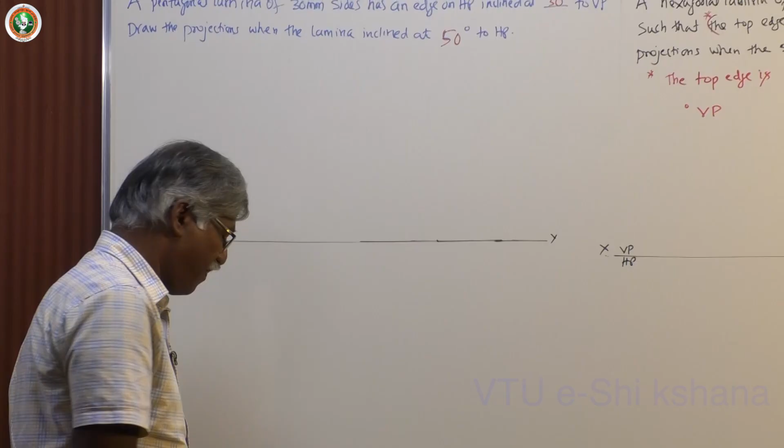Now let me take out one problem on pentagon. Normally in majority of the cases you get pentagon problem as the prime item in the question paper or test or in the classwork. Now let me take a pentagon. Here we have the corners named A, B, C, D, E, and I can have the references like this. The edge on HP, lamina inclined at some degree to HP.

Okay, and the edge on HP is inclined at some degree to VP towards XY line or away from XY line. If the situation demands, then only you do this. Otherwise, you always better take this. So first position, second position, third position. So this is how you get the problem solved. This is change of position method as usual. Now I have a problem.

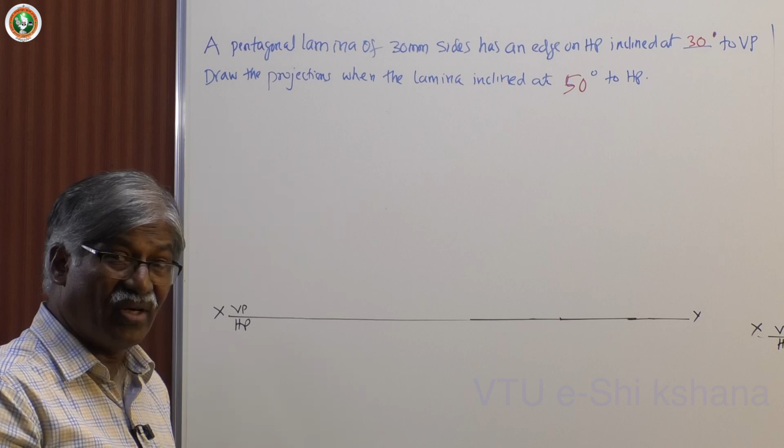The side of the lamina is 30 mm and it has edge on HP inclined at 30 degree to VP. See, the edge on HP is inclined 30 degree to VP. The lamina is inclined at 50 degree to HP. Not necessarily that always you should get combination of 45-30 or 30-45. You may get any value. If you get total value 90 degree, then only you must think of.

But if it is for only surface total inclination is 90 degree, then you get alpha or beta equal to 90 degree. If the surface inclined at 50 and the edge on HP inclined some value, say 40 or 50, then you need not worry. Different items. Now surface itself is having inclination more than 90, it's a problem. It's a vague problem. Now let me start working this problem.

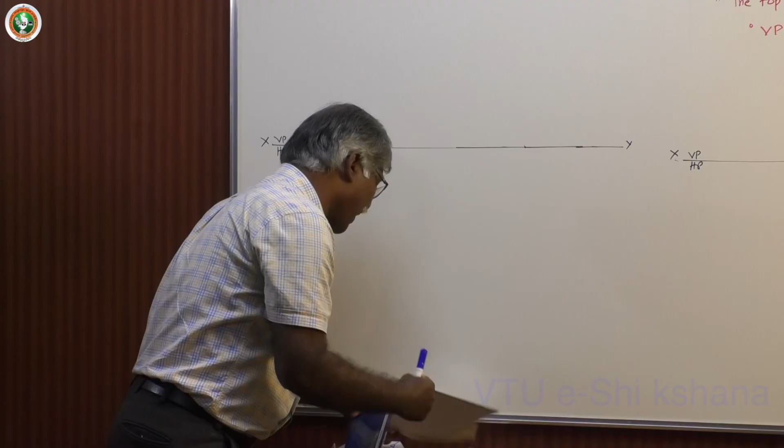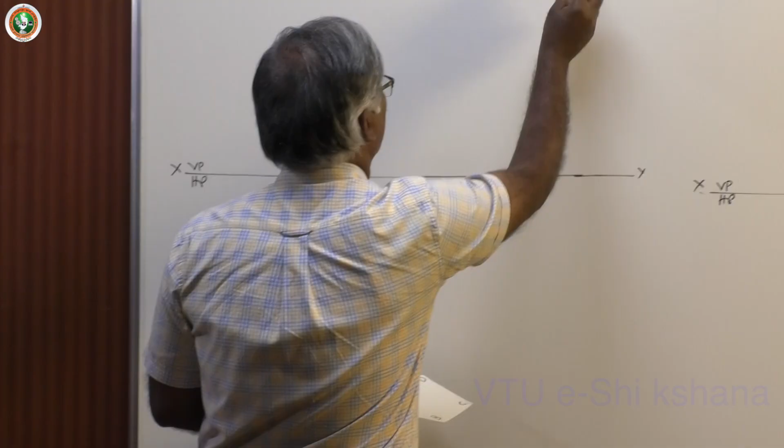So we have already the XY line fixed and the HP, VP, the standard format. Now let me have the edge condition. So from where you have to start? The lamina inclined to HP. So definitely you must make it parallel to HP. So you get true shape on HP. So this is very important. Start from top view, okay, because the lamina inclined to HP, so that is edge condition with respect to HP.

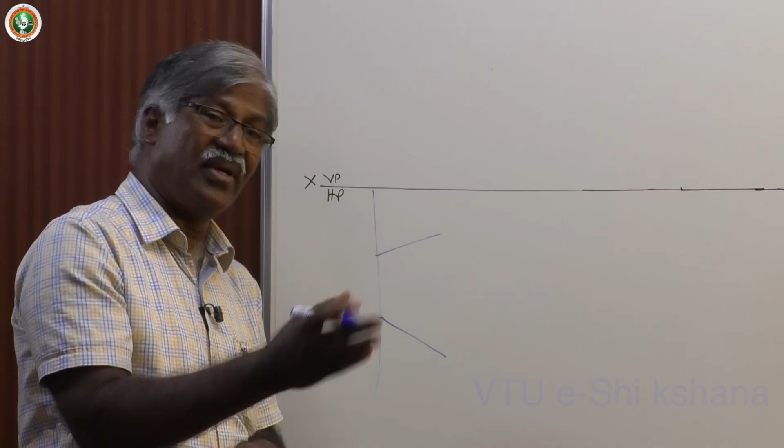So see, this is how you do it on a particular line, perpendicular line. You must have this AB, then do it. How to do manually? You have to mark 30 mm, little away from it, so that you should accommodate the entire figure. Then 108 degrees, 108 degrees. Take carefully. Normally we commit mistake by taking 112 or 72, instead of 72 we take 68. Then take same distance, mark.

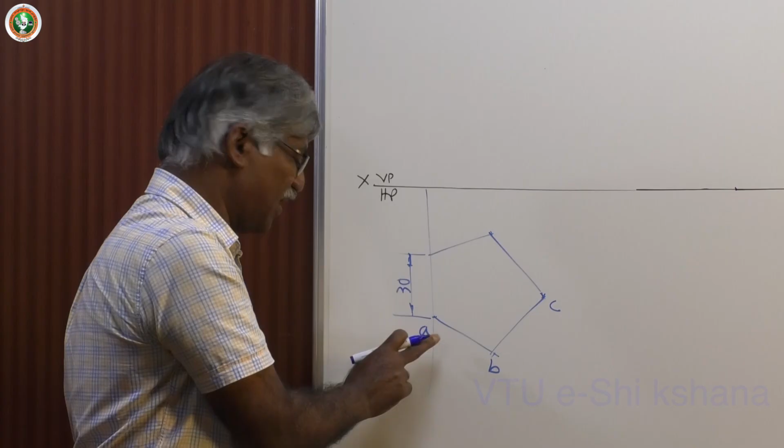Okay. Then with these 2 points as center, draw 2 more arcs, same distance. So 30 mm is the side. Should take this and then draw. Then join this. So this is nothing but the top view. This is A, B, C, D. Please observe, I have started from left extreme nearest corner. Always visible points first. Left extreme nearest corner is this A, B, C, D. Then dark this portion.

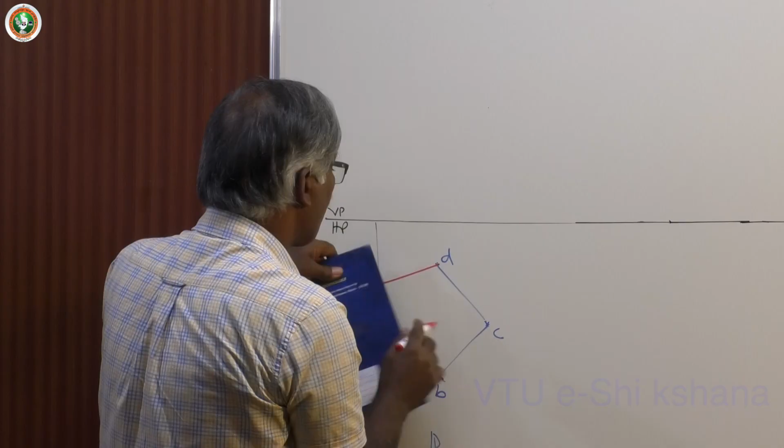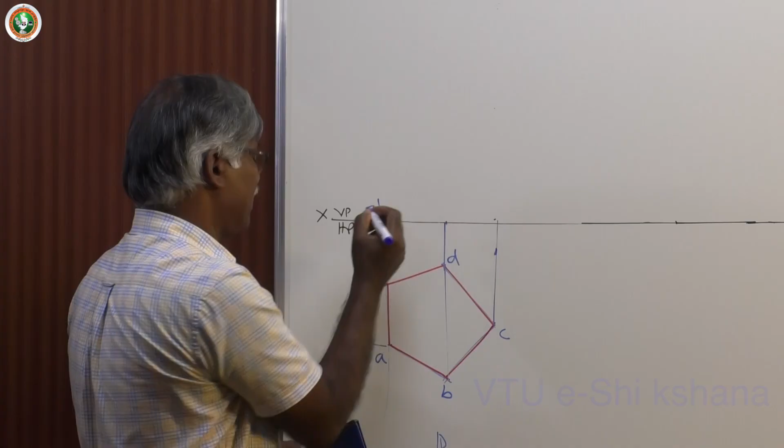Now project these points, corners particularly, towards XY line. Now let me have XY line reference. You should see that B and D in this particular case must coincide with a single line, and this is the point representing B and D. And next comes C. Project these points and name these points as A dash, E dash, then this is C dash, this one is B dash, D dash. Fine.

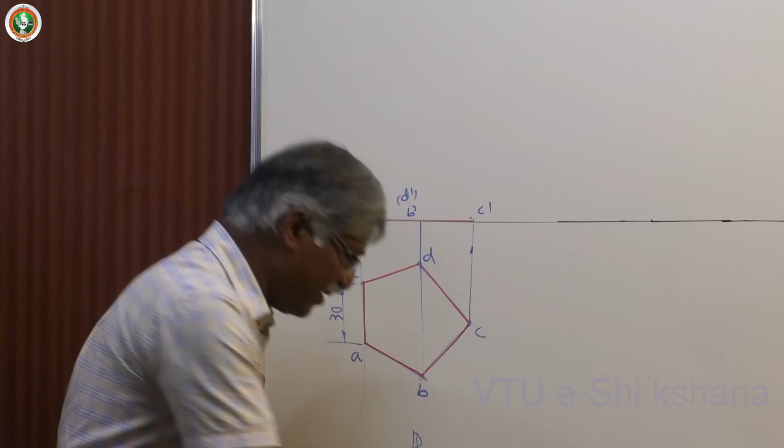We got the front view, dark. So this is the first figure, front view, top view, when the lamina is on HP. When the lamina is on HP, this is the case. See, A, B, C is visible, E and D are not visible if you look from this direction. Front view is a line on XY line itself because it is on HP. Then top view is true shape.

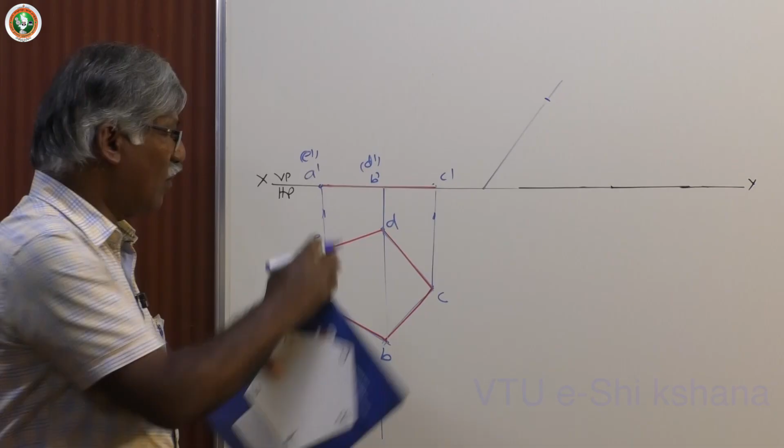Next, give inclination to HP. So how you do it? This is done manually by drawing a line 50 degree and take this front view length and draw an arc. In computer, move and rotate, that's all, it's easy. Here you have to mark a point, namely A dash, E dash, convenient distance, and then take this distance called radius, draw. Please note that this is not midpoint, this is biased towards right corner.

Okay. Now this is B dash, D dash, then C dash. In computer, what you do is, while drawing this full length, you mark this length and then one more length. That means two entities are there. But once you move and rotate, that gives a single one. Then you will be identifying this point. Otherwise, you have to note one particular mark with the straight line concept and then do it. That also I will explain once I start working on computer. Now, dark this portion.

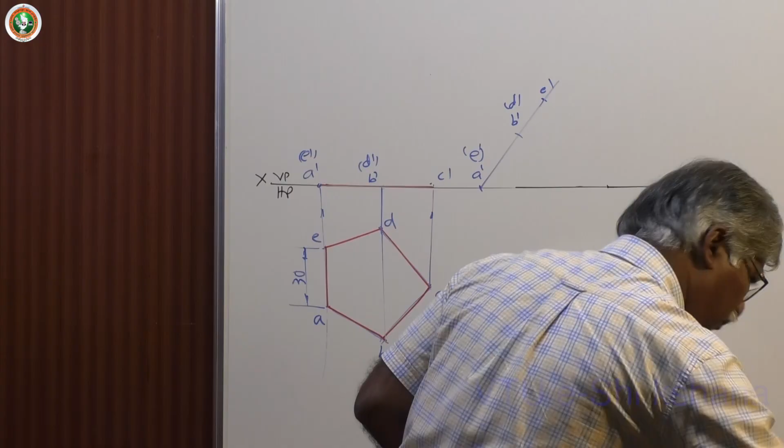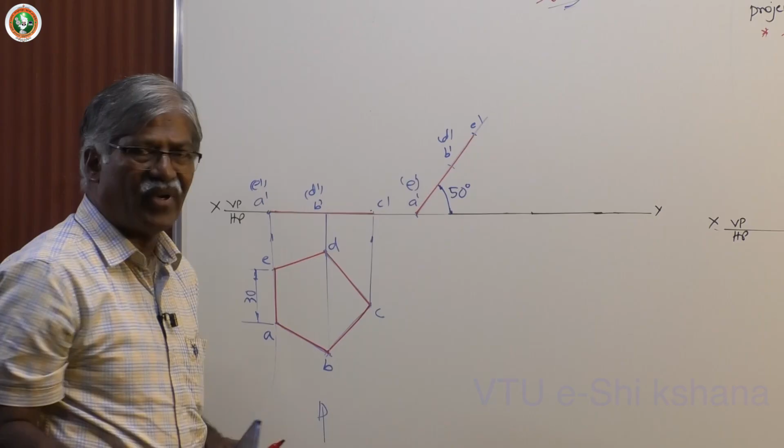Okay. Now, angle of inclination of the lamina with respect to HP is 50 degrees. It's very clear, it's given. This is over. Now, how to get the apparent shape? Project from the present front view and previous top view. So, you try to utilize the alignment indicator in case of computer software. Here also you can optimize, draw two stoppers, I can say. Project it, left extreme, right extreme projection from this corner, lowermost projection.

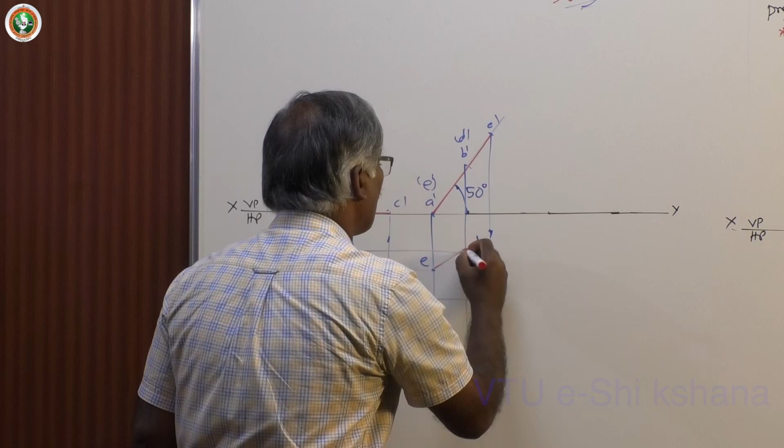Then draw B and D, then this line. You know very well that A and E stop here, and this is D, this is B, and one more point C is here. Okay, since you know C stops here, you can keep it here only, you do not worry about the extra. Now join these points, name them first, to avoid any confusion: A, B, C, D, E. Join them carefully. Yes, you got the apparent shape, second figure, top view.

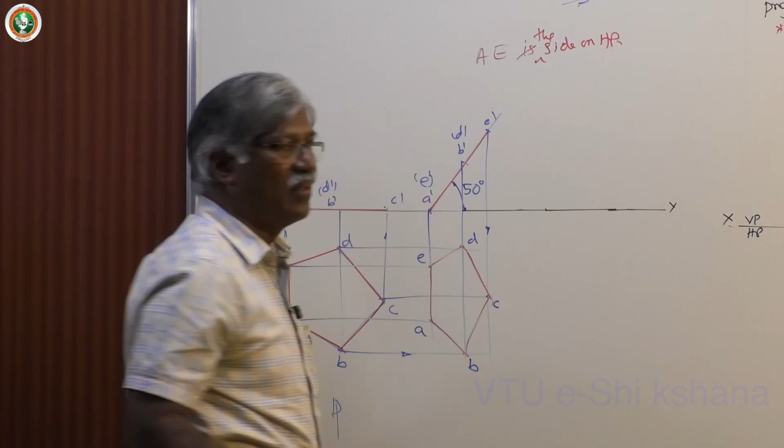Right now, this particular line EA, or AE, I can say, is the edge on HP, or the side on HP. Okay, see, AE, named it. AE first position, second position. AE is the side on HP. Now that is perpendicular to VP right now. I want it at 30 degrees to VP. So we have done this job in case of rectangle, triangle, square, etc.

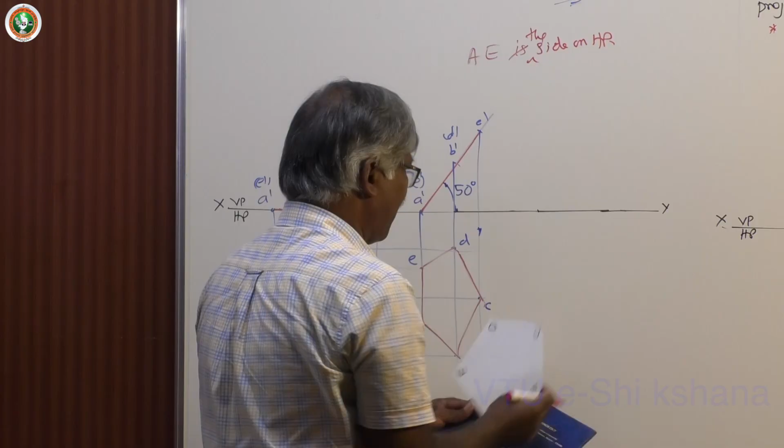Here also the same procedure. Assume that is the top view: first position, second position, third position. This is better, because if you do it like this, you have to judge before you draw where to draw. Here it is easy. If sufficient space is there, you can try it. Suppose if you keep it like this, it may cross this. So unless the situation demands, don't do that. By default, you take AE as the reference.

I will draw a 30 degree line. Keep EA first. Take sufficient length, E, then measure this distance, mark here, this is A. Then it's very easy to draw manually. Let me assume this is M for construction purpose. Then draw a perpendicular that locates one more point C here. Then take this distance, and that's all. Measure this clearly here, and then draw parallel to this. Then take AB equal to ED. Before joining, let me name them, yes, join these points.

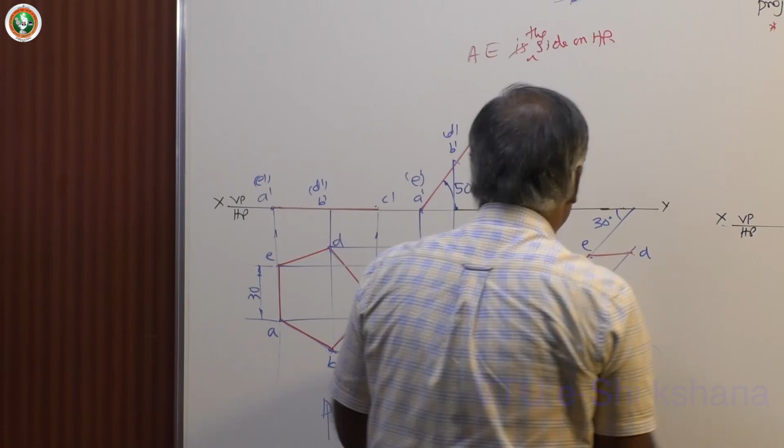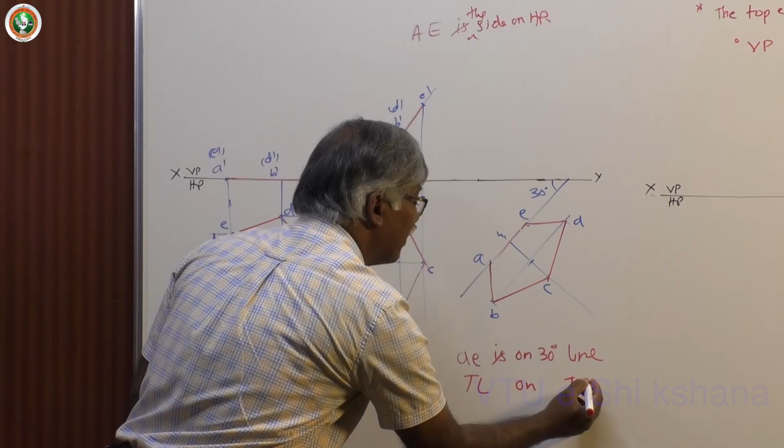Yes, I got the second figure top view redrawn with AE on the 30 degree line. That means it is true length on true inclination. That is phi. TL on TI, true length on true inclination. No question of beta because it is on HP. Now project these points onto the final front view. How to get the final front view? This is EA on the XY line only, because AE is on the ground, A dash, E dash.

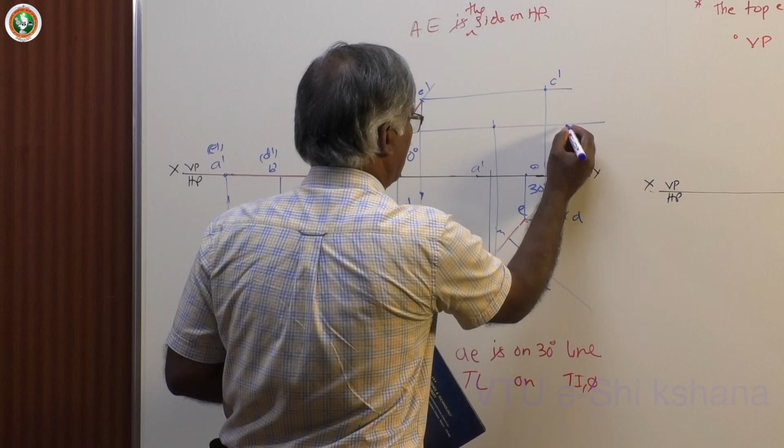Topmost point is C. Draw this, project it. You know how to work in computer, the alignment indicator is there, very easy. Then in between we have BD here, project it. Then project this one. Sometimes these two lines may be very close. That will be taken care of by the computer. Here also you can easily do it. In case of computer, try to zoom and then work it out. Now these two points, this is B dash, this becomes D dash.

Finally, we join these points. Be careful, try to locate the points, otherwise if you join some other corner, the answer will be wrong. A, B, C, D, E. Check this. Suppose by chance you keep it like this, that is no man's land. This one is E for us. Be careful. Now, final front view, final top view.

Let me check whether we have satisfied the conditions. 30 mm sides, fine. The lamina is inclined at 50 degrees to HP. Then the edge on HP is inclined at 30 degrees to VP only. It is on HP, inclined only to VP. This is the final top view and front view. Okay. So this is how you solve a problem manually as well as on computer. I will show you how to do it.

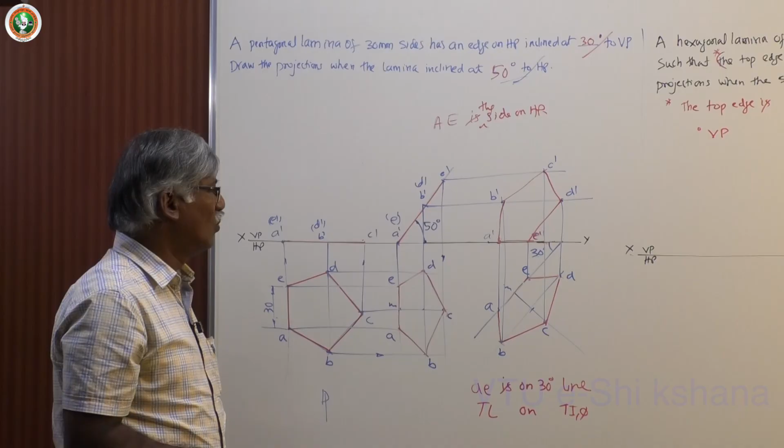Next, let me make a small change here and then try to work. Suppose he never gives this 50 degrees, he will not give the lamina inclination. He will give the top edge, or the top corner in this case. See, this is the case.

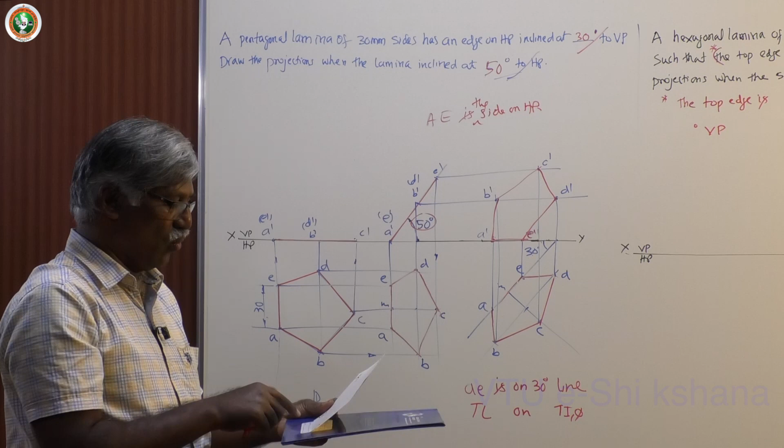See here, instead of inclination, he will give AE is on HP, say. For sequence I am considering this one, A, B, C, D, E, AE on HP. C becomes top corner. Suppose that it is corner condition, C is on HP; if these two are making equal inclination, AE becomes top edge. Now I have this problem, very easy to discuss.

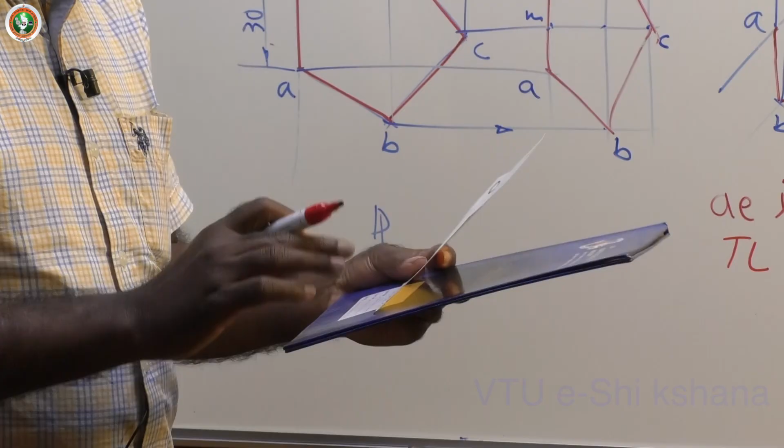Top corner is some distance above HP. Instead of giving inclination, he will give this. How to deal with that? Same solution. I will show you how to do this job. In computer, I will show you this sequence. Now, this problem, after this, I will use this. I will mark AE. Okay, second figure only I draw.

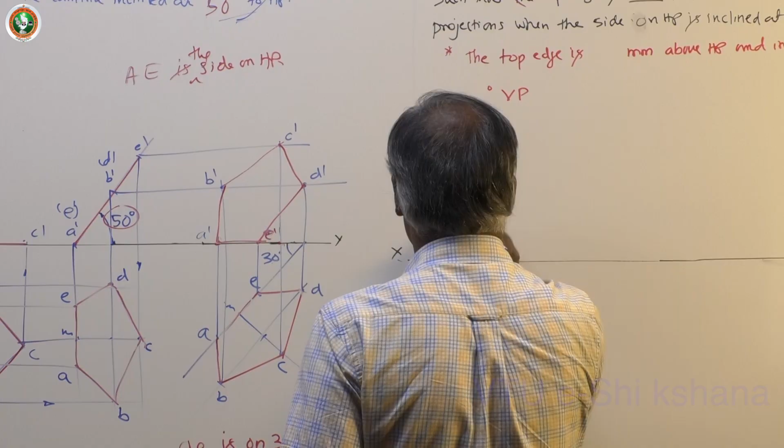AE. Forget about this problem. AE. Now, draw an arc. Draw a line. This is locus of C dash. This is the top corner position. Now, on this line only you should get C. What you do is, take the first figure front view and draw an arc. See, this particular figure I am redrawing for this data.

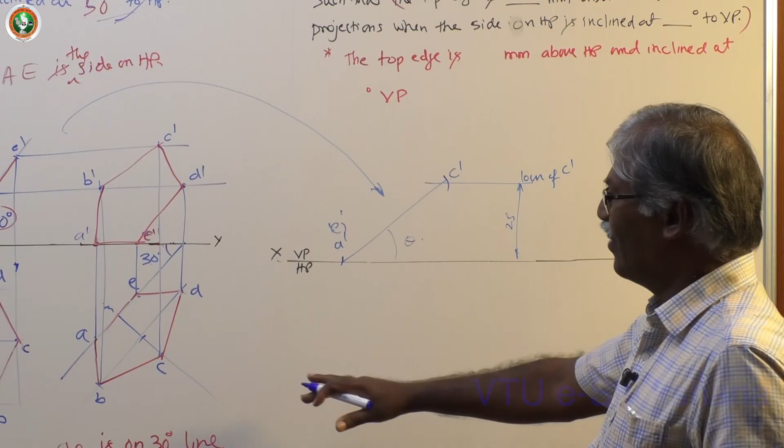Suppose that this is 25 mm above HP. The top corner is 25 mm above HP. So what you do is take 25 mm and front view length equal to radius, draw an arc. Then this gets you inclination theta. That's all. Rest of the things are same. You can go on working the same fashion. Okay, this is how you work a problem on pentagon.

The criticality of the pentagon is keeping these figures manually. In case of computer, it is easy. Only thing is you have to set this in computer. How to set in the computer, I will tell you. Now, let me take one more problem. Hexagon problem.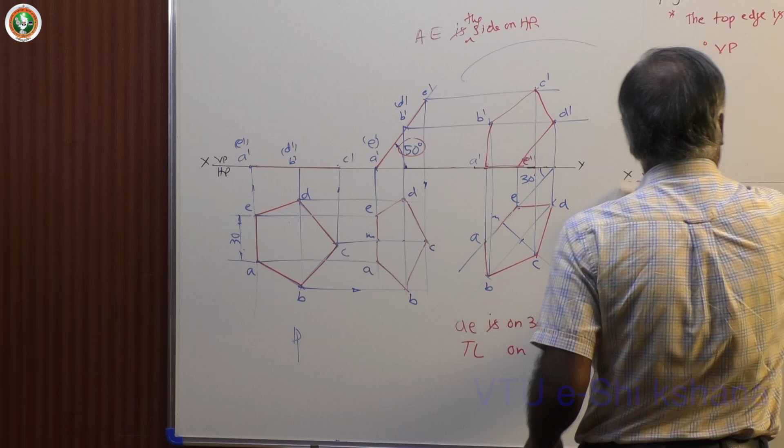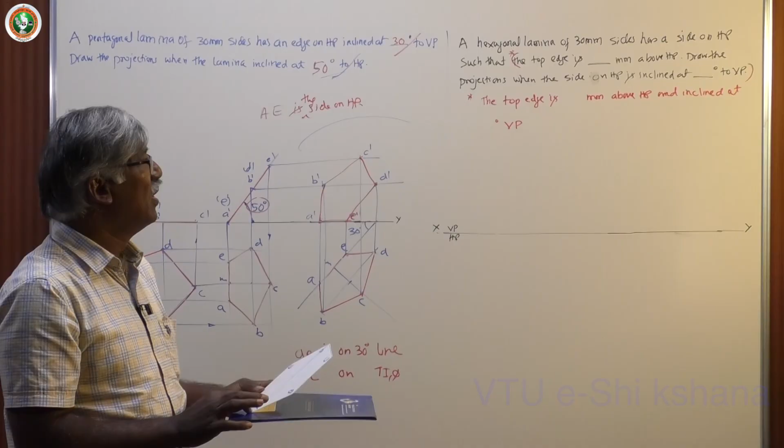See, a hexagonal lamina of 30 mm sides has a side on HP. Again, same thing, edge condition with respect to HP, or side on HP. The first version I will take: let me take 25 mm and this is, say, 30 degree. Some angle I will take; it can be 40 degree or 50 degree, whatever. Now to work out this problem, let us understand the problem clearly. The lamina of 30 mm sides has a side on HP.

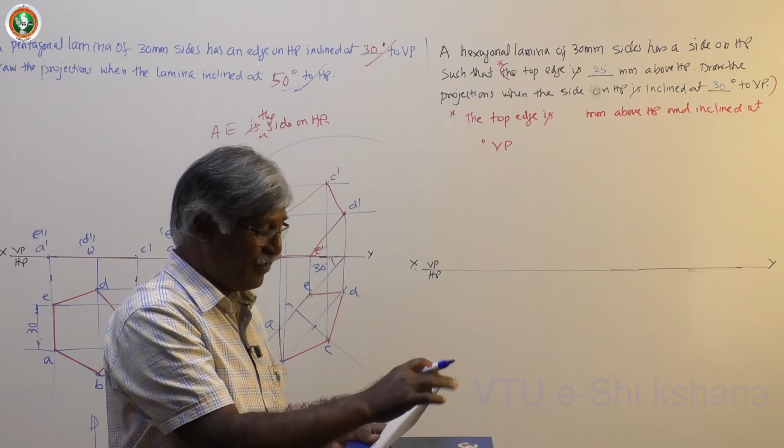Yes, side on HP. This is the top edge, or sometimes they will give the side opposite to the edge on HP. Same thing, top edge. In this case it's very clear. Degrees of freedom is 0 here. While rotating, you can rotate only like this, give inclination to HP. Top edge is this. In case of corner, I can do any way. Degrees are many, but here the edge is restricted. We can do only rotation. This is the problem with top edge.

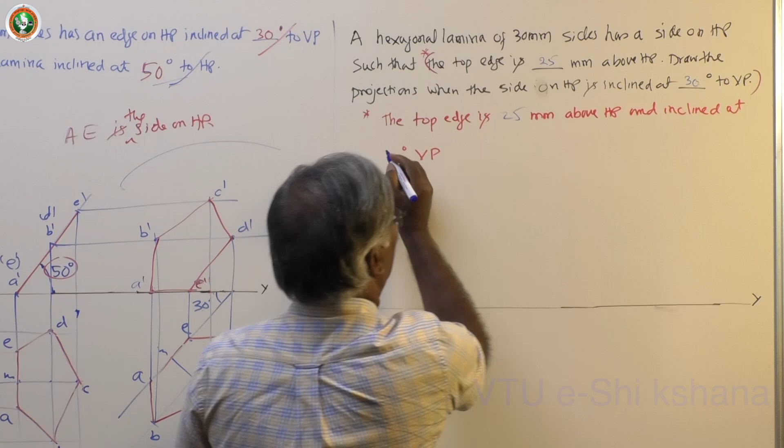The top edge is 25 mm above HP, and in first version he says the side on HP is inclined at some degree to VP. If they give top edge inclination to VP or the side on HP to VP, same thing, because these two are parallel. So try to understand this. The version may be different in your question paper or test or class work. So I take this: the top edge is 25 mm above HP and inclined at 30 degree to VP. Same thing.

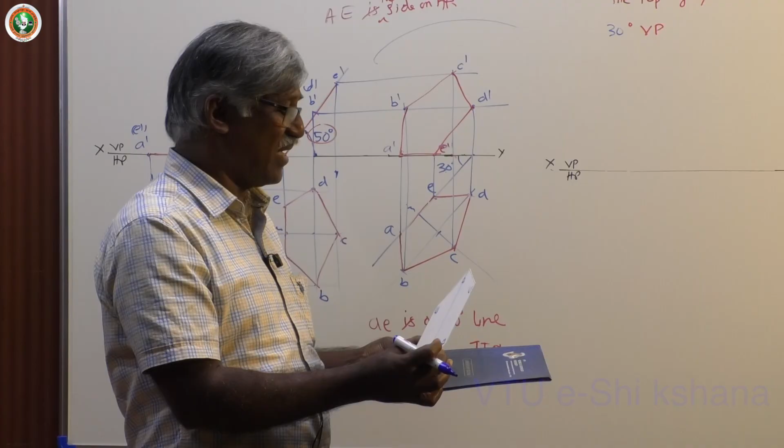So you must concentrate on where you have to start, whether from top view or front view. It is definitely top view because it says top edge is some distance above HP. If I normalize the situation, first position, second position. I cannot give inclination to VP, because in that case it would say the farthest edge from the VP is so much distance. Here very clearly the top edge is given above HP. So the final situation is this or this.

Now let me normalize the situation. I have inclination totally to HP. Now I can make it parallel or keep it on HP. I get the top view as true shape. So start from top view. Now I will draw the figure. In case of manual construction, it's very easy.

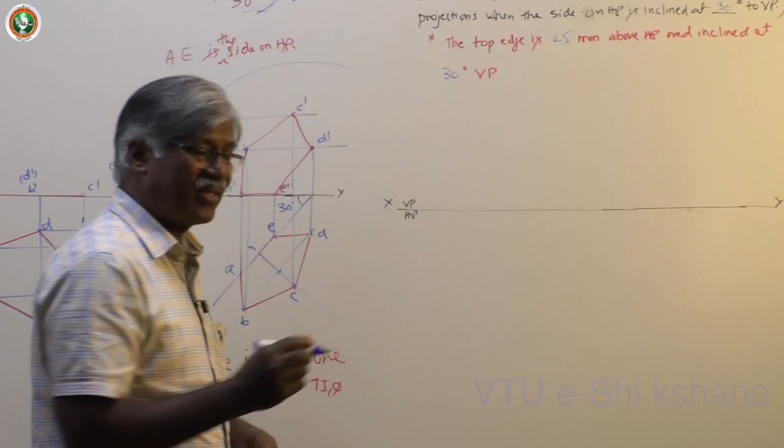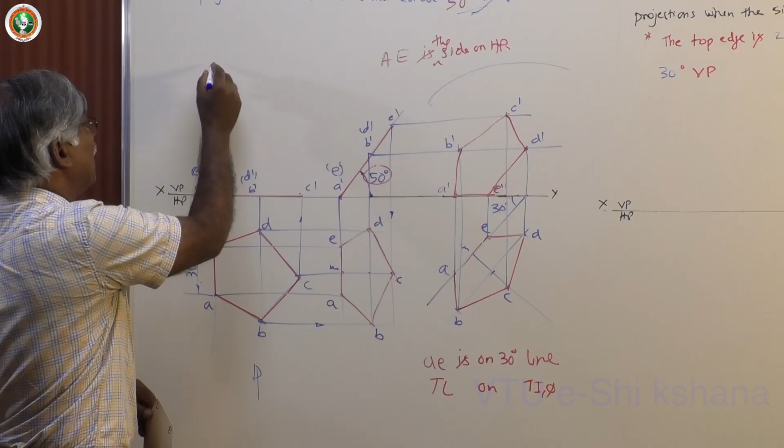I will show you here how to construct a hexagon using the radius method, arc method. Draw a circle of side equal to radius, like this. Then if you want a corner here, draw two arcs from this point. Very easy to get. All these should be construction lines; manually, I am telling.

Suppose one more set I have, draw a circle. If you want this side corner, edge condition, with these two as centers, draw two arcs with a radius equal to 30, because side equals radius. Take this as center, draw arcs. Then you get the hexagon. This is the way you get the construction manually.

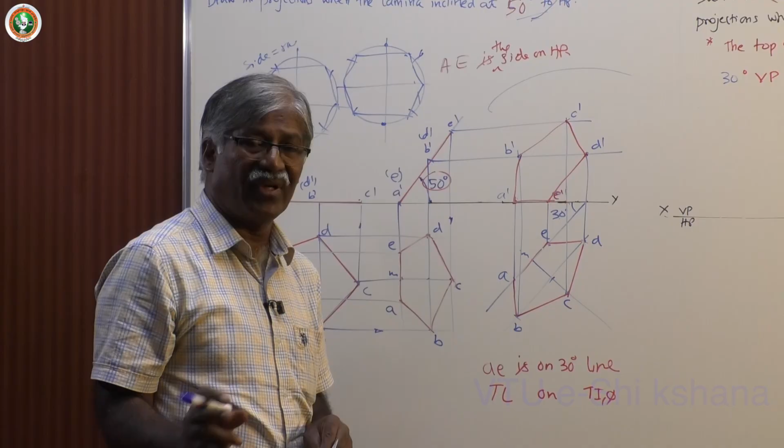But in computer, you can directly get the hexagon or pentagon, whatever the polygons, by a particular radius, and change it to your requirement. Hexagon is very easy, by radius equal to the side. Now let me start working. You must keep the side perpendicular to, okay, this one, A, B, C, D, E, F. Like this you have to keep.

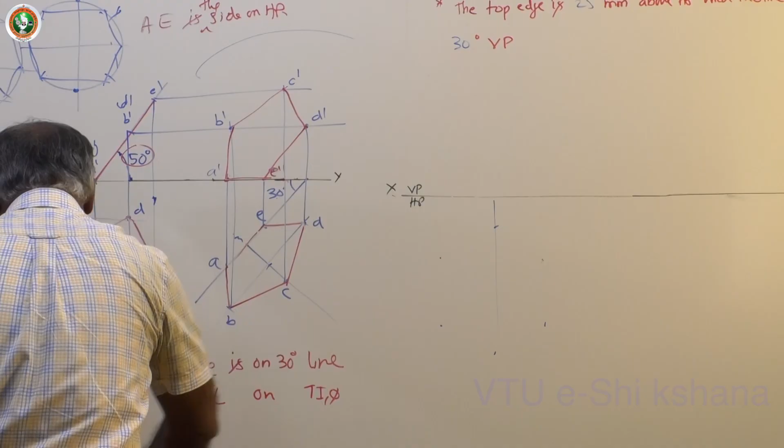Now, I will try to mark using this. Same method you can use. Let me dark this. So this is A, B, C, D, E, F. Should not deviate from this norm. This is the left extreme nearest corner, visible points A, B, C, D, E, F. This gets you a very clear sequence here. Then dimension it carefully.

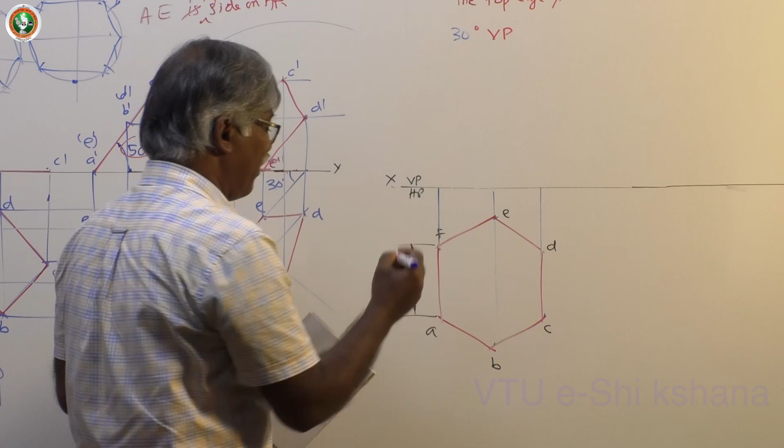It is given 30. Okay, project it. So name these points. This is A dash, B dash. This is the advantage of starting from this, invisible points, next invisible points. This is D dash, and you will get a clear idea, no confusion. Then dark this portion.

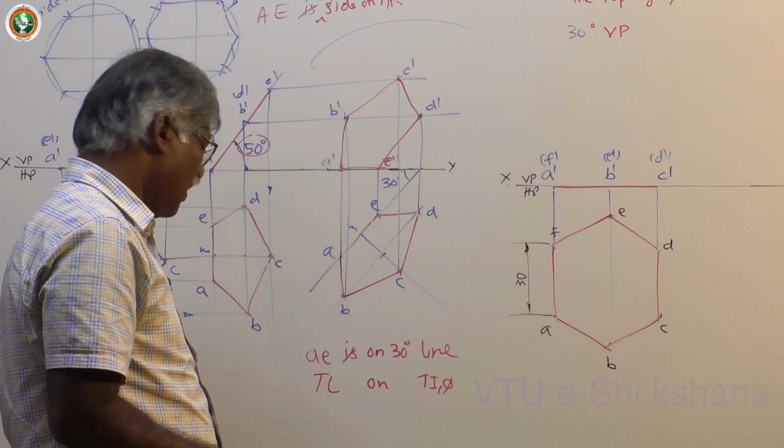This is the first figure front view, A, B, C, D, E, F corners. This is the front view, and this is the top view. Top view is true shape. Next, I have to do this job. The side opposite to the side on HP, or top edge, is 25 mm above HP. This is how you get.

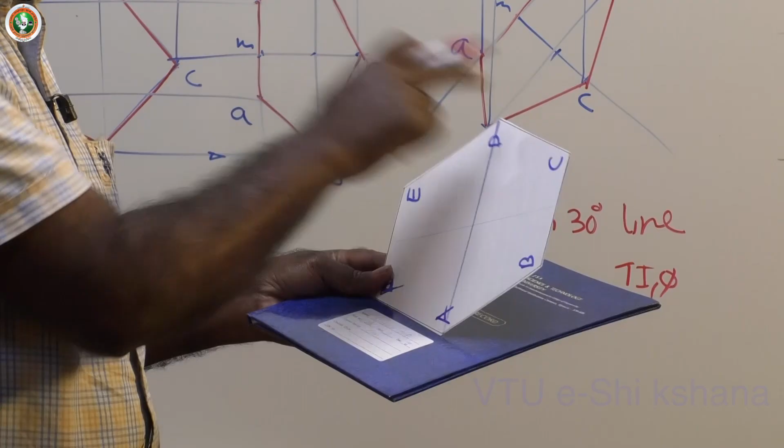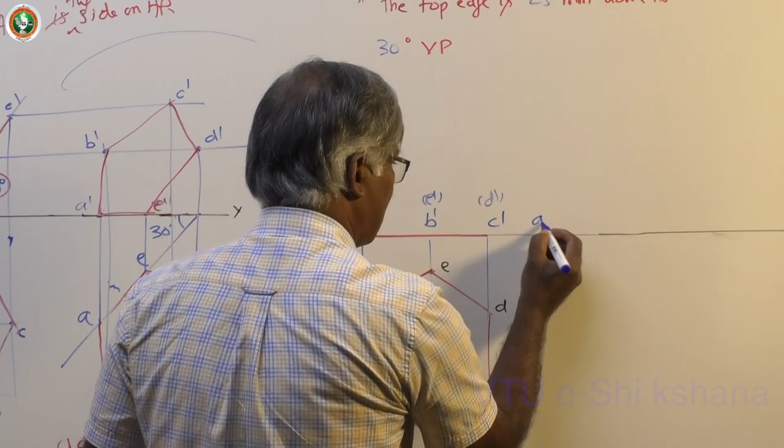See, this is HP. This is the edge on HP. This is the top edge, the side opposite to the edge. You should maintain 25 mm. Instead of giving inclination, he has given the height. Already I explained that with the pentagon. It's a typical problem. Now I will mark one point, then name this as A dash, F dash.

Maintain some gap. Then draw a line at the height of 25. This is the locus of C dash D dash. On this line only you should get it. If I get inclination, I draw a line and fix that. In computer you move and rotate. Here it is fixing the end; I don't know the inclination.

Simply take this equal to radius, draw, join them carefully. You get C dash D dash fixed. Then how to fix this? It's very easy. A characteristic feature of hexagon, square, etc. in this type of edge condition, corner condition, is you get exactly half, the midpoint. You need not note down.

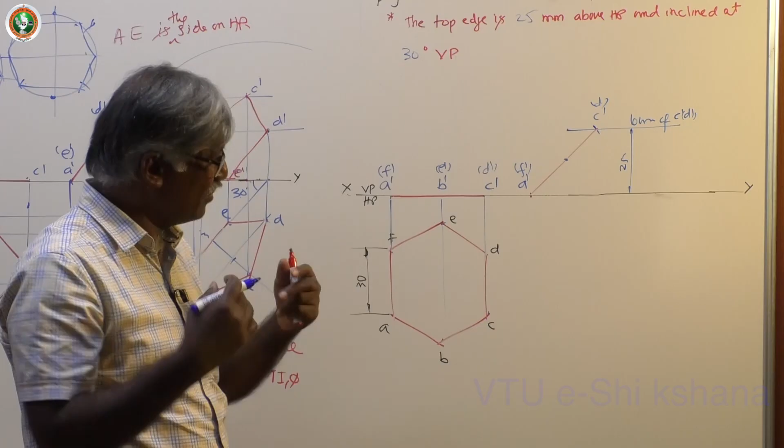Simply mark B dash, E dash. Otherwise you can have a line for your reference. But manually you should do it. Take this arc and draw it, even though it is the midpoint. Now you can find the inclination with respect to HP, theta. Sometimes it will ask you how much is the inclination.

Next, get the top view. As I told you earlier, keep two stoppers, one at the right extreme and then lowermost. Should not go out of it. Draw a thin line. Then E will stop here. B is already available here. If you draw two lines, that fetches 4 points. This is C, this is D, this is F, this one is A.

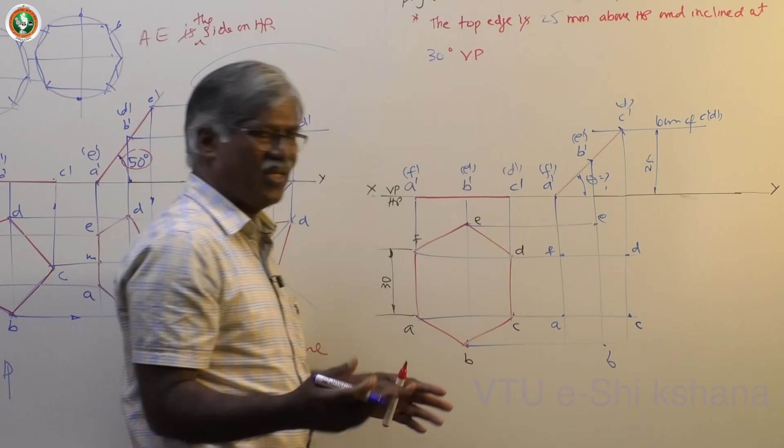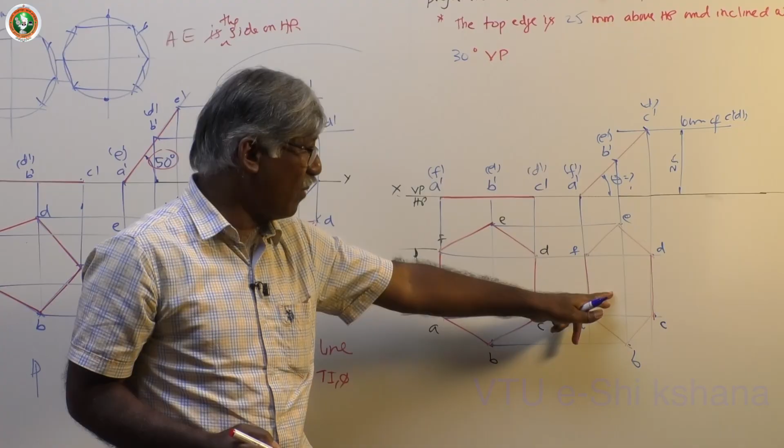So optimize your method by drawing a minimum number of lines to get the points. You should not go on searching points. Now join A to B, E to D, C to B, E to F. This is the final second figure top view, when its top edge is 25 mm above HP. Next, the side on HP is inclined at 30 degrees to VP, this one, EAF.

If you give this version, you must dimension to AF. Suppose that the other version is 25 above HP and inclined at 30 degree to VP, you should consider this. Both are same, inclination will be same, but you should dimension to CD, not to AF. At the same time, you should not take any other side.

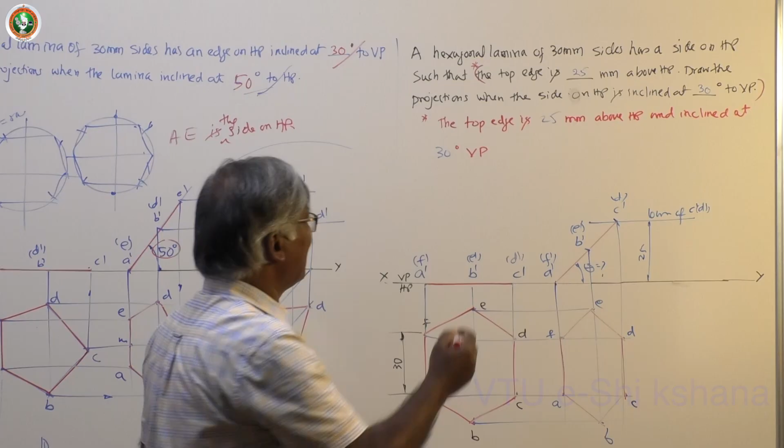You must stick to AF for the first version, and stick to CD in second. Suppose by chance you give to AF only, there is no worry, but dimension it to CD in second version. So what I do is, assume that I am getting second. You are familiar with AF, because AF you take nearer to it and do it. But if I get CD as the reference, how do you do it?

It's easy. You take CD a little away from it and draw a line, because I have to manage this space. This you draw, that is 30 degree. Then mark DC. Carefully take this distance and mark.

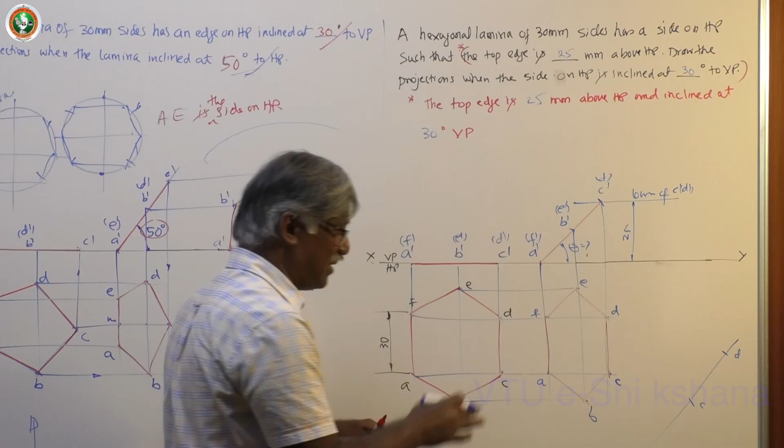Again, how to mark this? Manually, but in computer it's easy, just move and rotate. Manually it's again draw perpendicular lines, two perpendicular lines, mark these 2 points. Take this and this one. Take one distance that works for 4 points. I have taken only one distance, and it's because of symmetry, easy.

Then join this directly, you get one side, this is another side, then you have the midline, take this distance, mark. That's all, no worry. It's easy to redraw. Only thing is you should know how to redraw a geometrical figure easily.

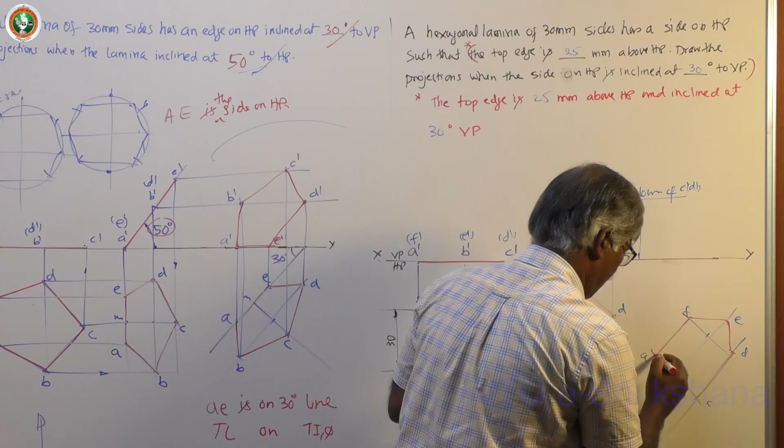This is A, B, C, D, E, F. Prefer to, if you are working, you keep it always vertical, then join them. Okay, next, this is only for understanding. If you want, you can keep it sufficient. In computer, you can move away from that. Then draw this.

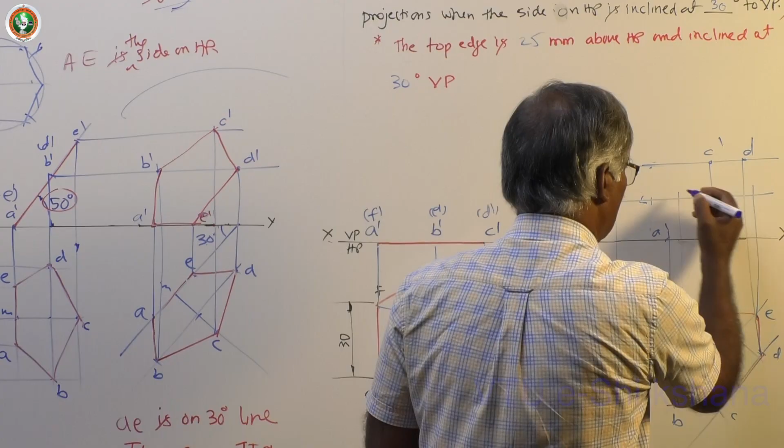Again, draw projection. AF is exactly on the XY line. This is A dash, F dash. Then CD is the topmost points, CD, C dash, D dash. Then BE, projected already, then project on that. This is B dash, this is E dash. So I have taken an approximate inclination, I think almost 45 degree, but if you take 30 degree it may be a little bit away on the other side, but the concept is the same.

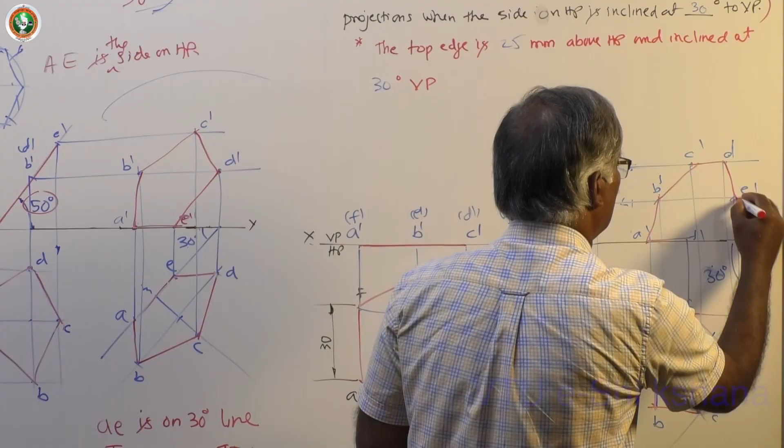Anyway, I will show you on computer how to do it. A, B, C, D, E, F. So this particular figure is referred to as final front view. This is final top view. You can easily realize what exactly I have done.

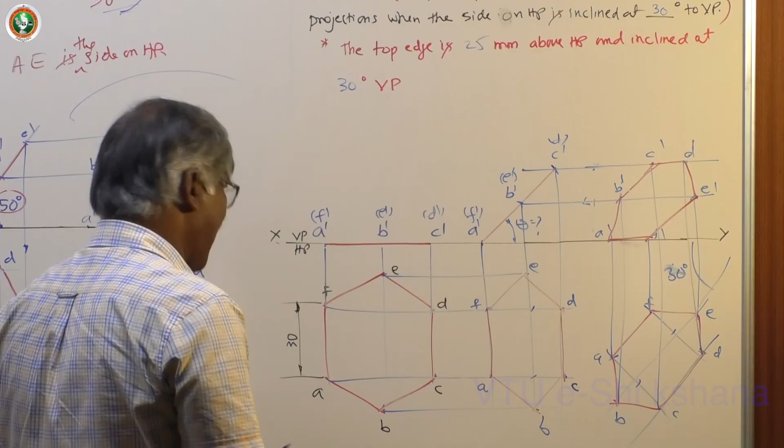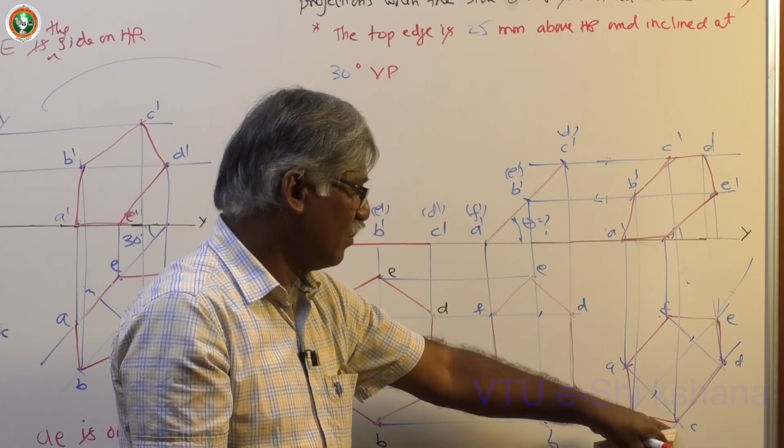See, the top edge CD is inclined at 30 degree to VP. Now I have done this for drawing purpose, but finally you try to understand for what they have given the inclination. Even this is correct, absolutely correct, but you should dimension it to either: if they ask first version AF, you must dimension, project and do it. If they ask second version, you must dimension it to CD. Now let me dimension it to CD.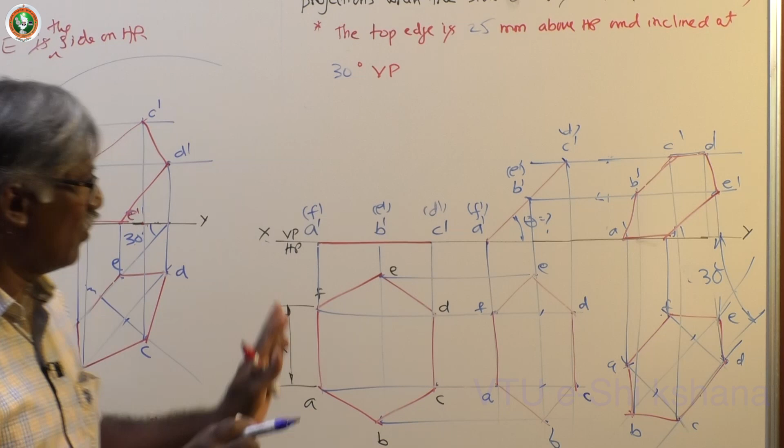This is 30 degree, so the CD is the top edge. You can see the topmost edge that is parallel to HP and inclined to VP. Or side, also the same thing: it is on HP and inclined at 30 degree to VP. This is how we can solve the problem, whether they give the inclination or the top edge, definitely you can. This is how they change the problem.

That's all. Okay, so these are the ways of working the problems on pentagon and hexagon. So I will work the same on computer software. Let me take a problem on pentagonal lamina.

A pentagonal lamina of 30 mm sides has an edge on HP inclined at 30 degree to VP. Draw the projections when the surface of the lamina is inclined at 50 degree to HP. Already we worked out the same problem on the whiteboard, there we considered the same angle of inclination with respect to HP, and the inclination to VP also the same thing.

Now I will discuss briefly the edge or side on HP, then the lamina is inclined to HP. Definitely you must start with the edge condition with respect to HP. Start from top because you will get the true shape on HP. This is how you get the edge to the left side always for most of the lamina, unless the condition remains a different position. Otherwise, the same condition, by default you have to start.

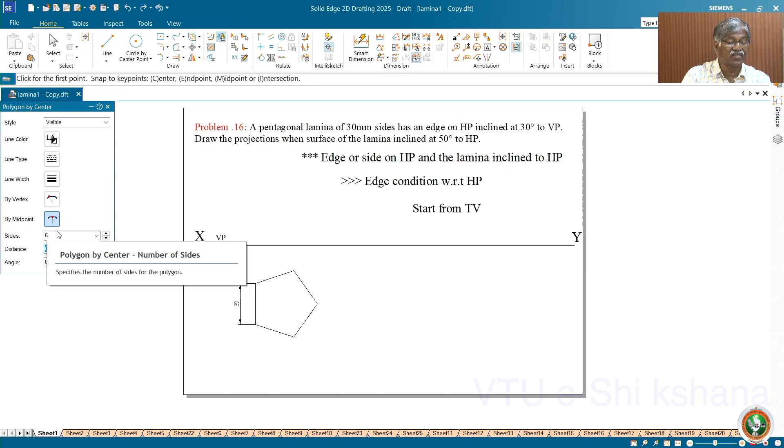Then how to draw a pentagon? Now you have the choice of the polygon by center, so you will get these details. Here we have side 6, I want 5, so I will repeat this figure for your convenience. Now if you start and drag it, you will get pentagon. See, automatically you will get pentagon.

If you want the edge condition, then you must do like this. If you want corner condition, this way. See, the arrow and some line, the blue line is coming, it's horizontal, vertical. Then you must set.

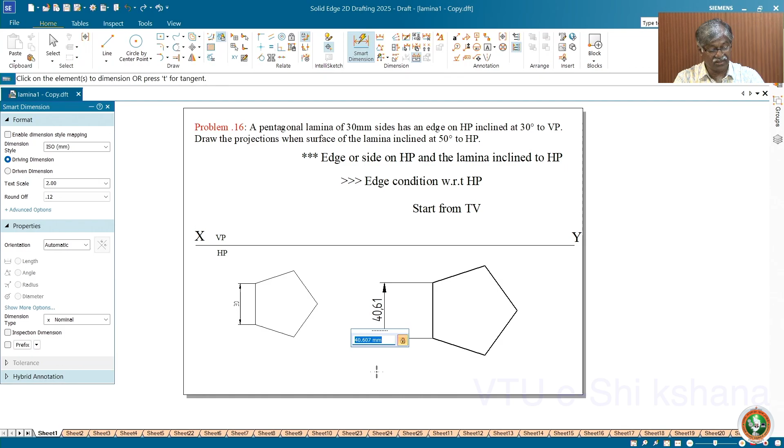So fix this, then go for smart dimensioning. Smart dimensioning gives you how much you want, say this 30. Don't worry about this, it gets you there. Then you move this to the required position, or if we can fix at a particular position, you move to this position and see, I have the edge condition. So this is how you can create the pentagon particularly.

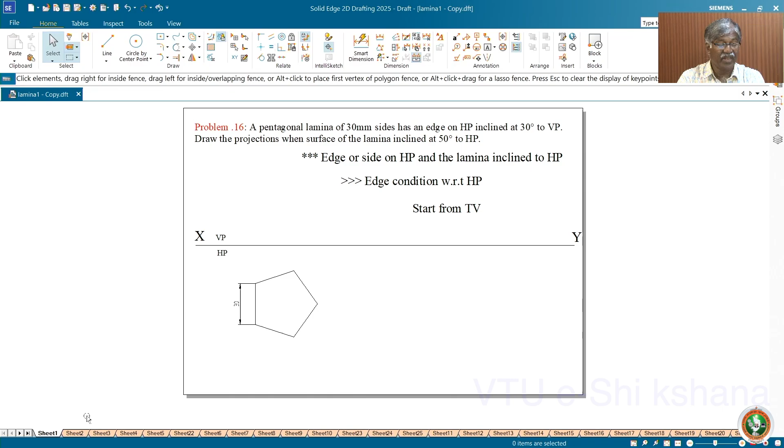Now assume that I have already fixed this. Now this is the edge condition with respect to HP. Top is the true shape. Name this and then project this to the front view. You get A dash, E dash, B dash, D dash and C dash. These are ABC, start from the left extreme nearest corner.

Dark these two. Now once you take this, you have to give inclination to the HP by 50 degrees. You must be very careful, 30 and 50. If you do ulta, it's a problem. Take care, inclination with respect to HP is 50. You take this front view length at 50 degrees to the XY line. That means you are giving inclination to the HP with respect to the lamina. So you know how to move and rotate. So this is how you get the points.

But the thing is how to identify BD. In case of square and other things, it's easy, you project it and you get the corner. But here point is there. In case of hexagon also you get a midpoint, some reference. But there also if it is corner condition, you get 2 more points.

How to do it? So while drawing this front view only, you take this as one entity, another entity. I have done it like that only. See, you can see the red mark here, again you can see the red mark here. If I select this, I will select only this. Then this end point will come so that you can project as BC.

So for convenience, you can take the line command and draw a small thin line perpendicular to it, and do it. That's what you can do. Otherwise, you can measure this and then draw a line. That can be done, either way it works. But you should know how to locate these points. So I have located those points, then projected it and got the points ready.

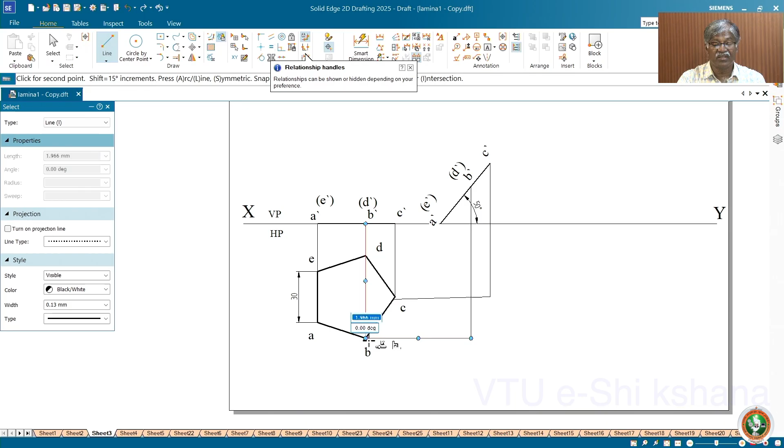Otherwise you go for different marking, whichever is easiest for you, you do it. See, this is for BD. You take D as reference, B as reference, and draw this line. Again, this itself gives you D on the same line. Next extreme A is here, lower, and touch with this A. Draw, then C. Unnecessary projections you avoid, you do only this.

Now assume that I have done that job, and then name these points as A, B, C, D and join this and get the final top view. Next,

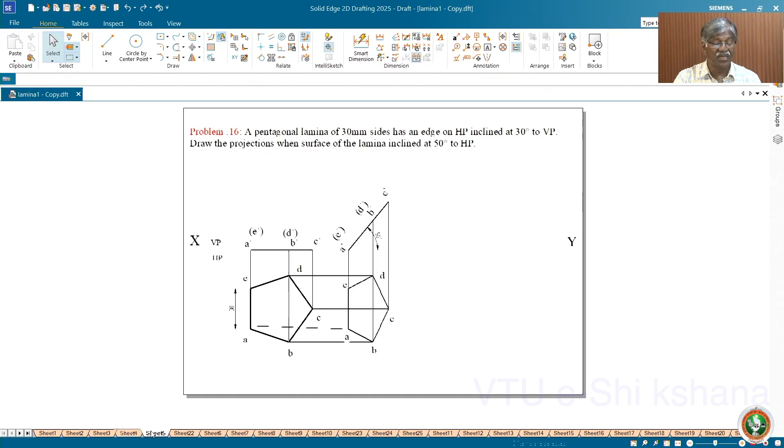AE is the reference for us. He says the edge on HP is inclined at 30 degrees to VP, so that is very important. Now this AE must be inclined at 30 degrees to VP. Right now it is perpendicular. So what you do is you move this and rotate so that AE is inclined at 30 degrees.

I will do that for your convenience. Now take the move command and see that this is shadow here, yes, dot, then complete thing, you move about C, then do it this way, then rotate this. How to rotate? You need not fix 30, you directly take it. Now rotate command, take this E as a reference center point, then rotate. If you want to do 30 degrees to the XY line with vertical, you must give 90 minus that, 60.

Then dimension it. Before you proceed, don't proceed until you get this angle confirmed. Sometimes it may vary because of different reasons, technical reasons, or any error you do. See, 30 degrees, so this is how you do it. Once you do that, you project it and get the final top view. So this is what I have done for you.

See this one, I have done that job for you. Then project it, here also I have used the alignment indicator. None of the points are having extra lines, unnecessary lines.

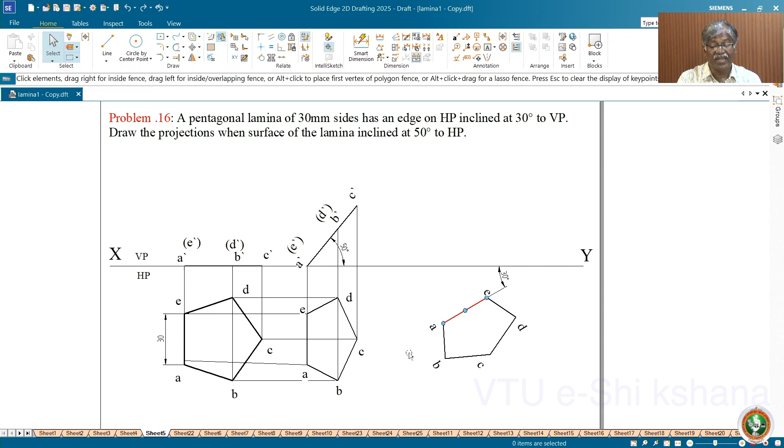Now I have taken this. Now you take AE away from it. Now the thing is here. See, instead of A nearer, you can take it away. So identify this with a different color.

Then you can project it, the answer is the same. Only if they give that the side on HP is nearer to the observer do you do this, otherwise even if you do it, no problem. That is correct, but by default you take the previous one. This is also absolutely correct.

Next, as I explained earlier, suppose that instead of giving inclination to the HP with the top lamina, they give the top corner as 25 mm to HP. So already I explained that the locus of top corner C you identify 25 mm above it. How to identify? Then I will show you how to do it.

I will remove this. Now you draw a line at random, but it must be parallel to the XY line.

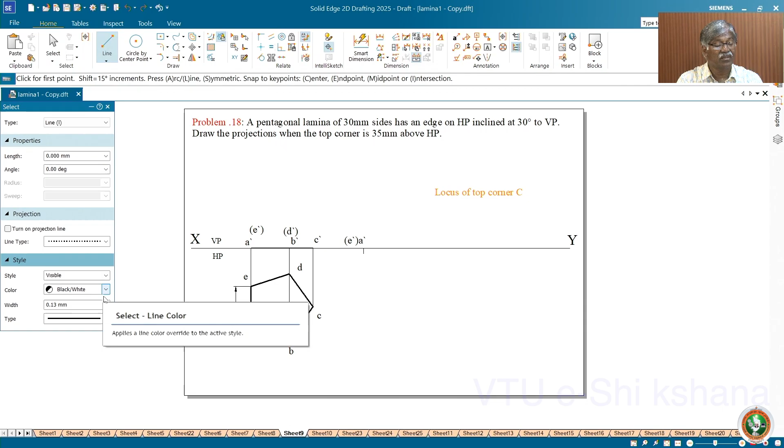Then see, this is 35 mm above HP. Take the distance between this line and this line. You will get something like 36.78, but I want 35 mm, so I keep 35 mm. That's all, so this becomes the locus of C.

So this is how you work. Like this, here 35 mm is there. I thought that 35 mm, you can keep any value. Now this 36 is there. Now I want 35.

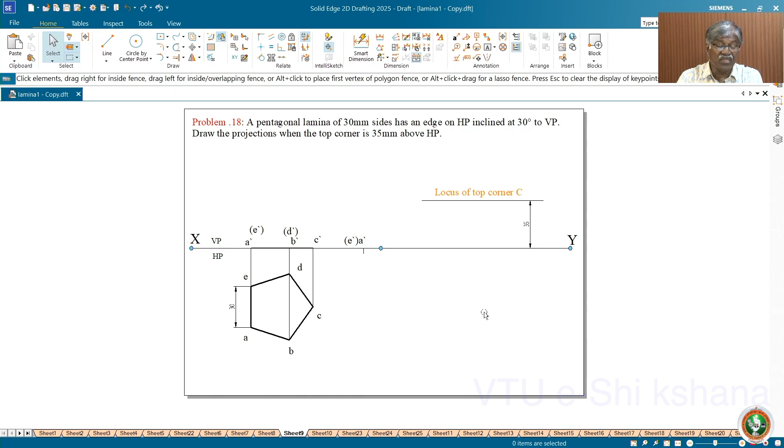Now how to proceed? Take this 35 mm all across. Take the front view length equal to it, draw an arc. Then you get the point. You identify this BC, measure this, and mark it.

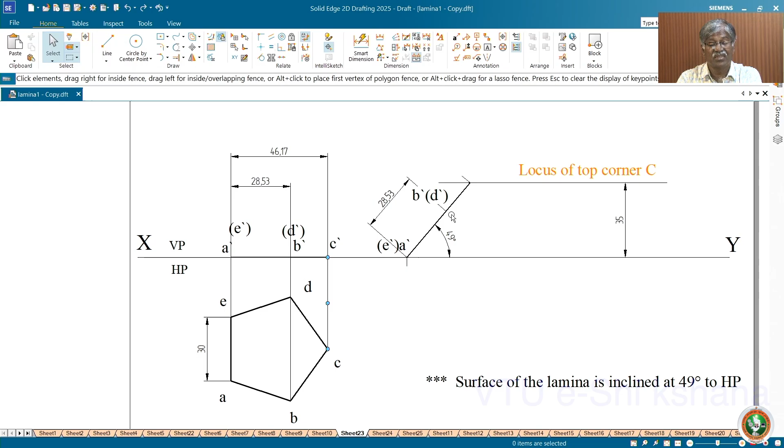Otherwise you make a different entity here. I have done that job actually. This is different, see, this is a different color. If I select this, it becomes different. Now you keep this distance, or you can have the initial stage and do it. Now you name it next BC, and this one, C is missing here. Then finally you try to get this, this is C dash.

It is very important, keep C dash carefully. Now let me take two. C dash. So this is how you get the front view and the corresponding top view.

See, after doing this same procedure, there's no change from the previous problem. Only thing is, instead of the angle, I got the angle 49 degrees. Especially in the manual working, I took this as 25, now I am taking it as 35. Then you will get it alternately, there I got some value lesser than that.

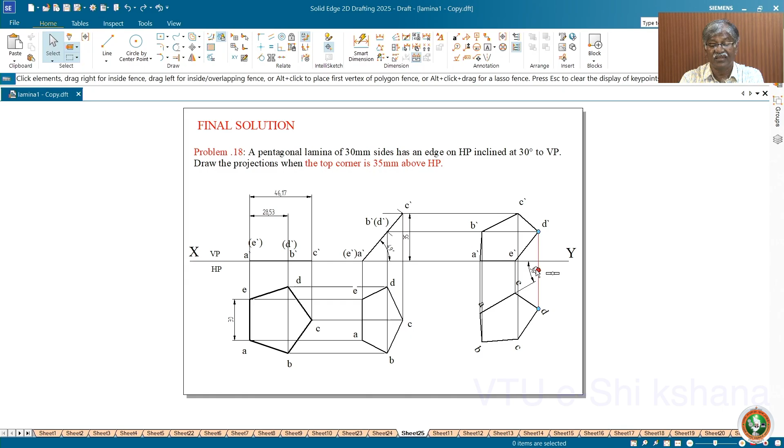Next, for the corresponding final views, you know AE must be inclined at some degree to VP given this way, so 30 degrees to VP. Now I have taken that and finally completed. So this is how you complete the problem on a pentagon when the angle of inclination is given to the lamina or the top corner.

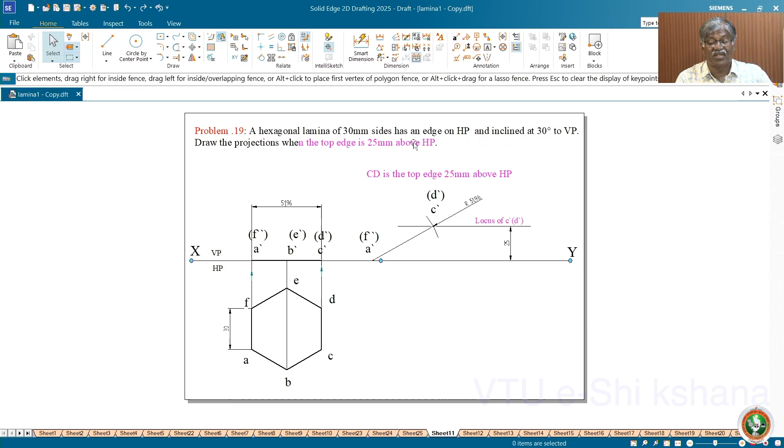Same procedure. Now let me take up the hexagon problem which I already worked out on the board. A hexagonal lamina of 30 mm side has an edge on HP, don't get confused with edge or side, both are same, and inclined at 30 degrees to VP. Draw the projections, the top edge is 25 mm above HP.

As I already told you, the edge on HP is inclined 30 degrees to VP, or they can give, if they miss this, they add here only: the top edge is 25 mm above HP and inclined at 30 degrees to VP. Here I am going to keep AF on HP, and definitely the top edge will be CD. Same procedure you have to follow.

Take 25 mm and front view length equal to radius, draw an arc, this gets you CD. Then draw the final projection in the second figure, keeping this midpoint. You need not mark anything.

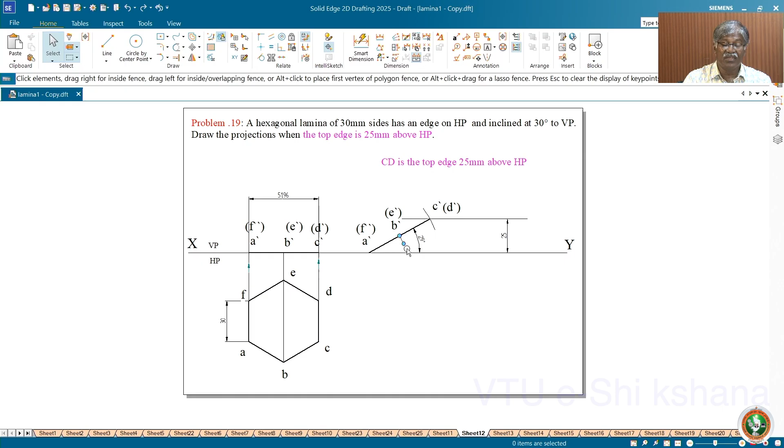Still, for identity, you must take some line or something. If you click on this, you will get the midpoint using the IntelliSketch, or this one line you have marked, whatever. But for naming, it's better you take one line. It will work out in the next session.